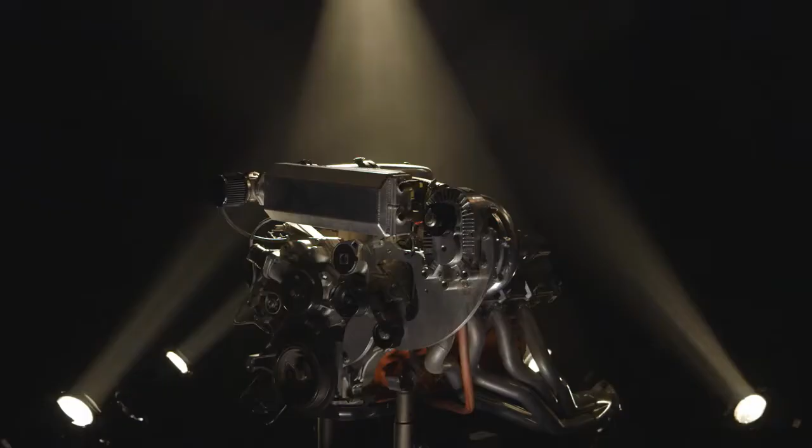This is the very first episode of an all-new series called Engine Masters, presented by AMSOIL. On this show, you're going to see me and my buddies having a whole lot of fun while doing serious testing on the engine dyno. We're going to be verifying the performance of speed parts. We're going to be doing a lot of head-to-head shootouts and telling you the whole truth and nothing but the

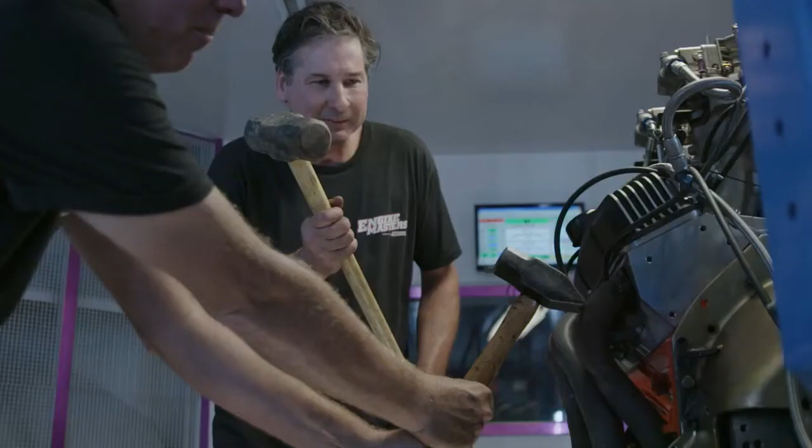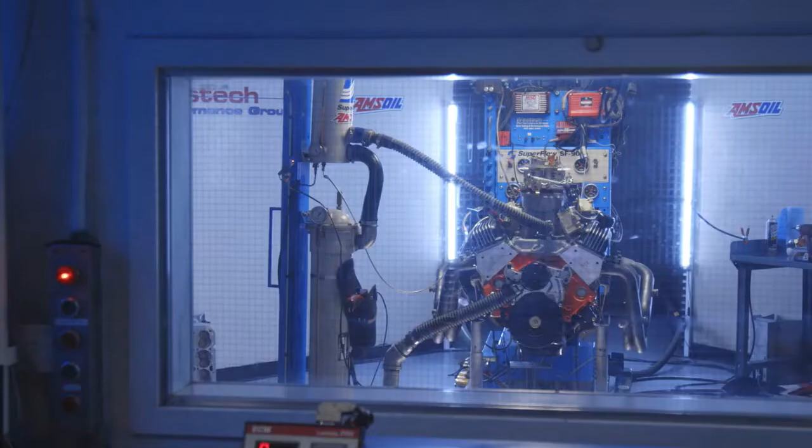truth. With me, you'll see Steve Dulcich, who is the editor of Engine Masters magazine, and you'll see other Steve Brule, who runs this place, Westech Performance Group in Mira Loma, California, where we do all of our dyno testing on the Superflow 902, and we're gonna kick it off finding big stinky power with a tunnel ram on a crate motor. Here's our baseline for the day.

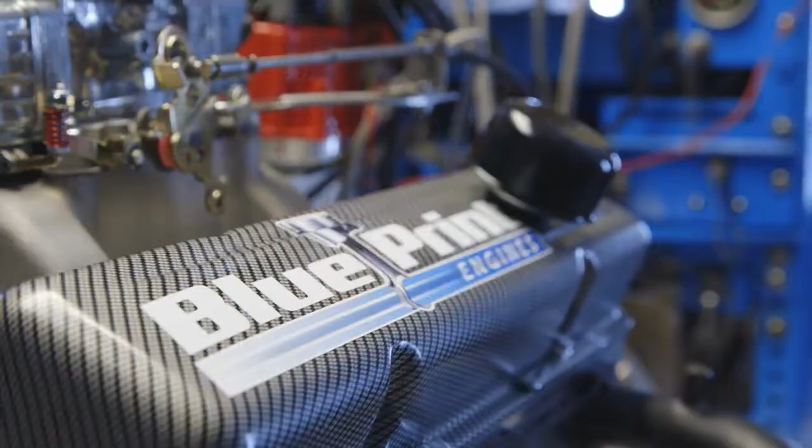A Blueprint Engines 400 cubic inch small block Chevy that's advertised to make 508 horsepower and 473 pound-feet of torque. We'll find out. The company is also pretty interesting because they design stuff, they manufacture it, and they assemble it and sell crate engines which are tested before they leave.

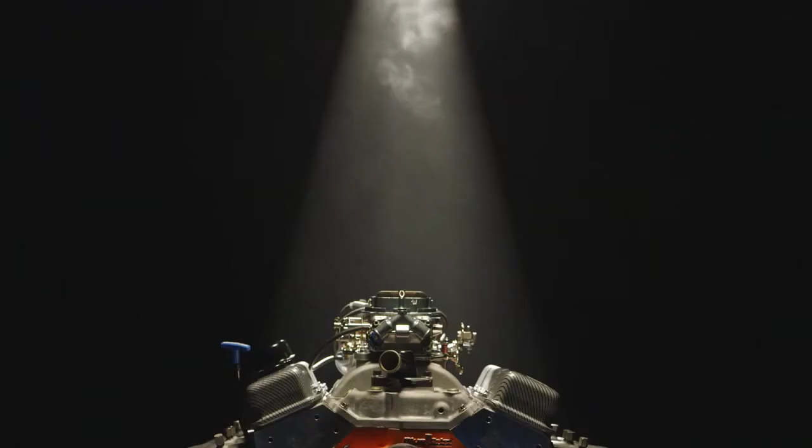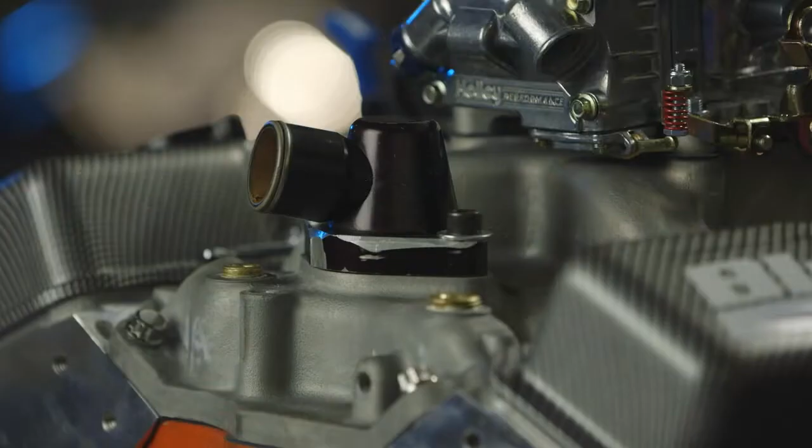This block is actually made by Blueprint Engines, so is the cylinder head, and when they put it together, they'll sell you this whole thing for $7,000, which is a pretty good deal considering it comes with everything you see here except for the water neck, the electric water pump, the damper, and these dyno headers. Now let's talk about the tech basics on this thing.

First of all, the Blueprint block is cool because it comes with a 4.125-inch bore. That's bigger than a standard 350 Chevy, which is 4-inch. The compression ratio on this is a zero-decked 10.3:1 with forged pistons and a forged crankshaft. The camshaft in this is a hydraulic roller. It's 236, 242 degrees of duration at 50 thousandths tappet lift. The lift is 553, 576, and it's on a 110-degree lobe separation angle.

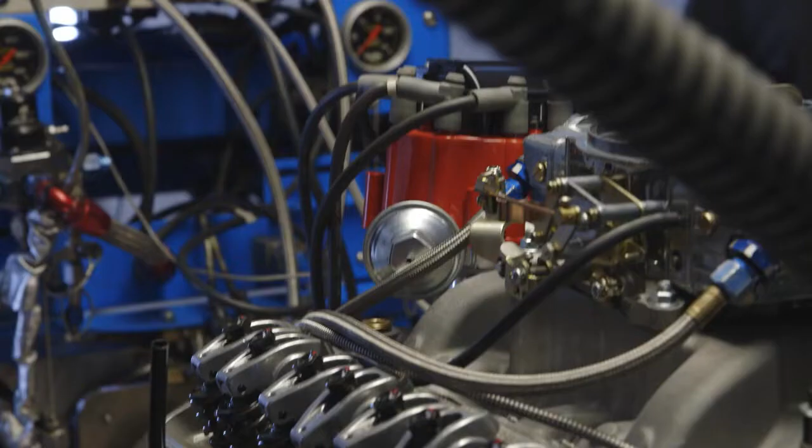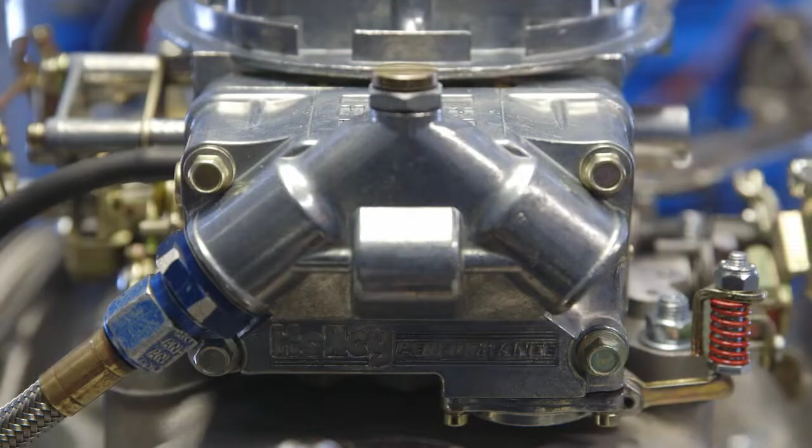Up top are the cylinder heads that we'll be testing today. These are an as-cast head, non-ported, with a 220cc intake runner. Up top, we've got a high-rise dual-plane intake manifold, and that is an 850 CFM Holley double pumper. Ignition is standard HEI, and the headers here are dyno headers, which make good power, and they're a 1 3/4 inch tube.

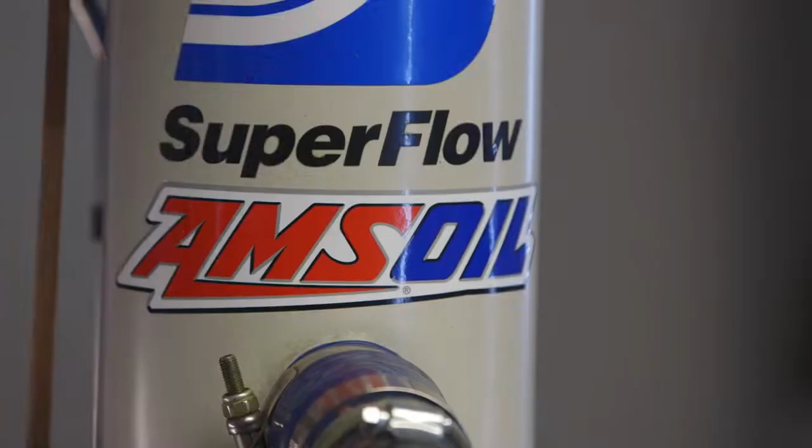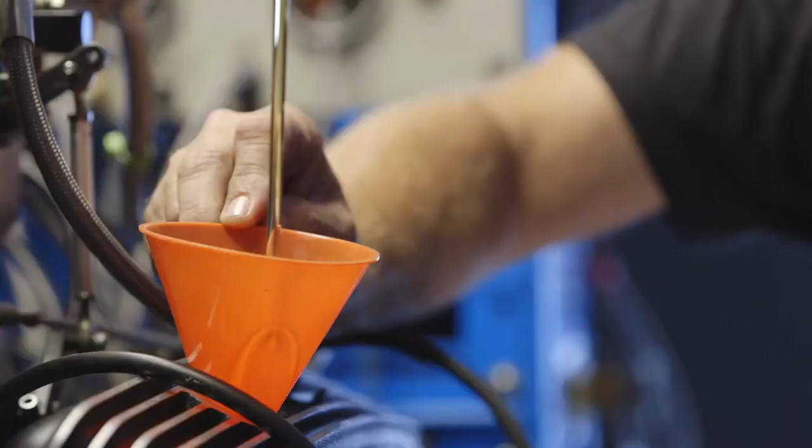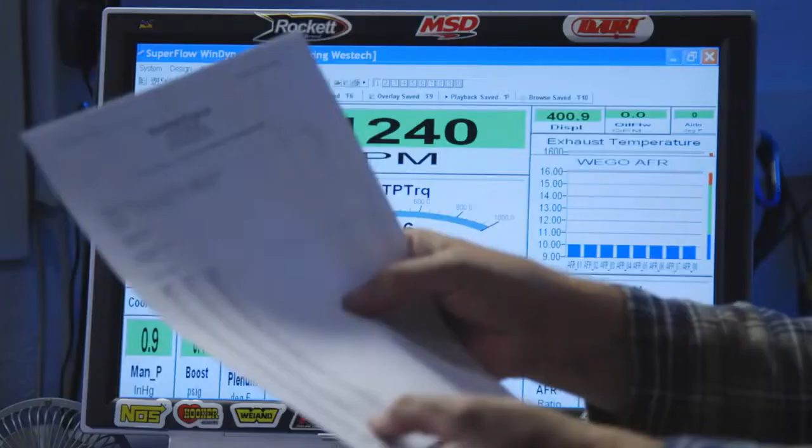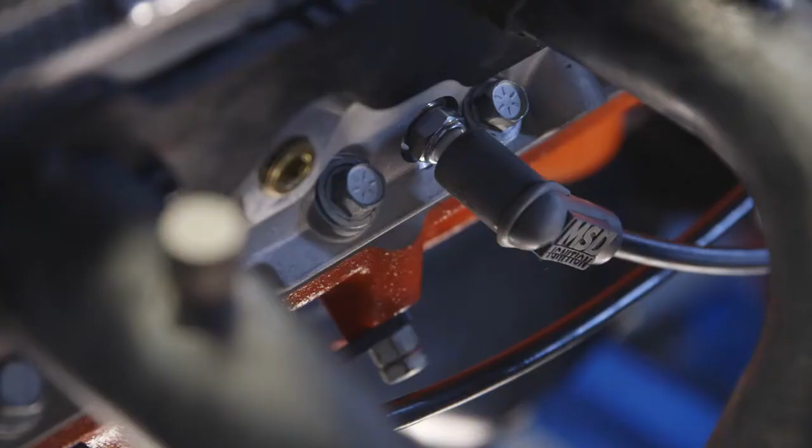We've got the Blueprint 400 loaded on the dyno, and they shipped it with a dyno sheet that Steve is holding, and it claims 509 at 6,200, which is right on target, but they made way more than 500 pound-feet all through the mid 4,000 range with a peak of 516.9. Wow. So we'll see. That's a lot of torque, even for 400 inches. This is the moment when we find out if Blueprint is mad at me or happy with me.

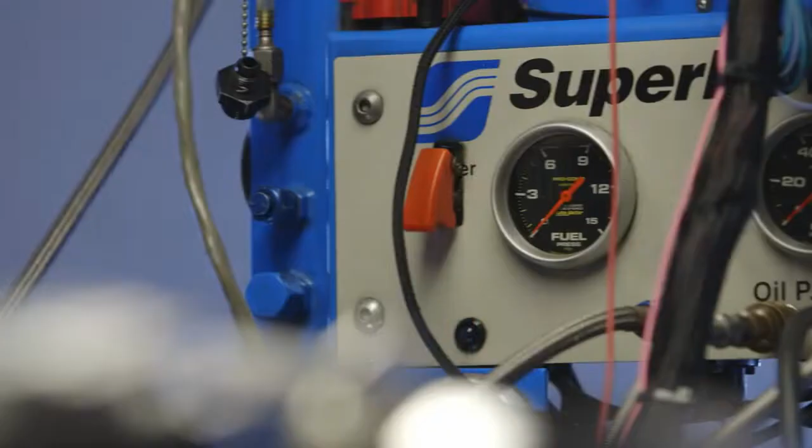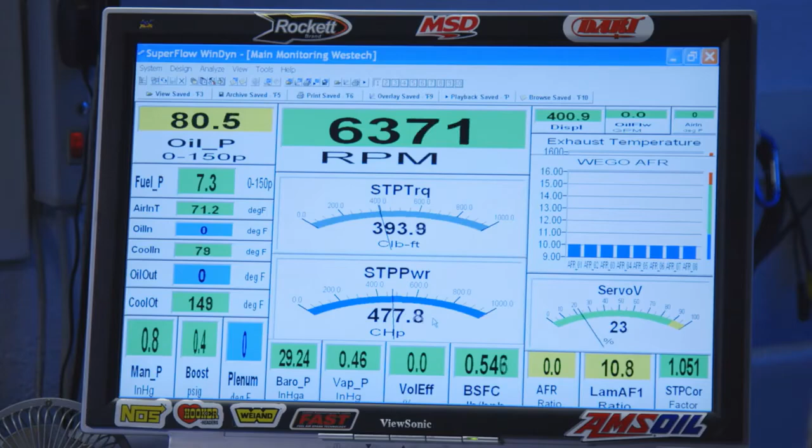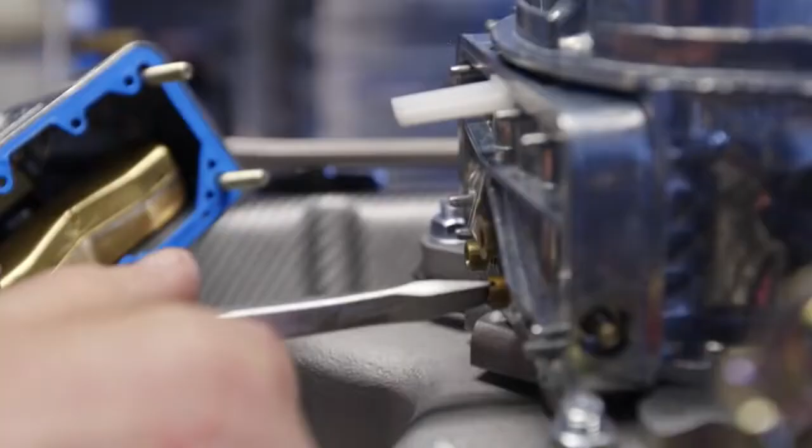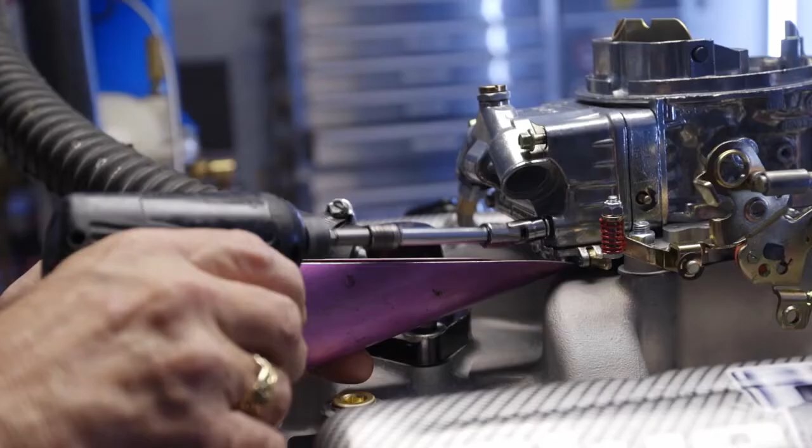Nowhere near. Yeah, we've got some tuning to do, obviously. It's still way rich. Here's what happened there. You saw that it ran way too rich. So while these guys were changing jets, I called Blueprint Engines and I'm like, what's going on? They normally test at like a 72 jet, and they're at 2,500 feet of elevation. This thing had 80s in it. 80s front and rear, which is kind of unusual.

We looked at the cruise air fuel ratio right before we went and made the jet change, and I think we're gonna be good and safe here. Okay, let's find out how much we fixed it.

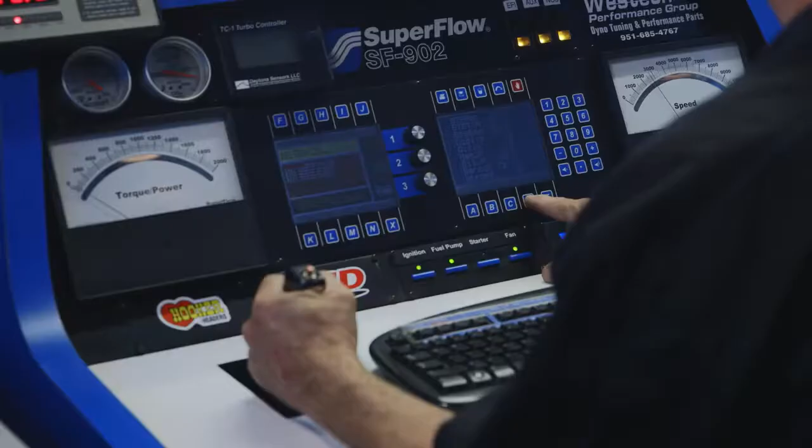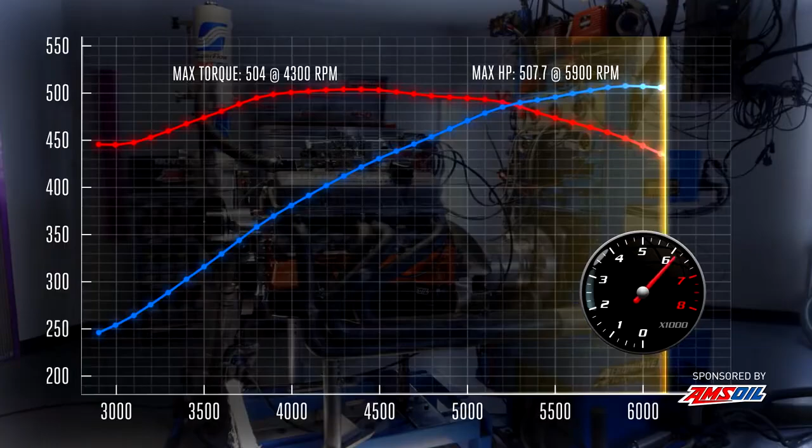Oh, we now have rock solid oil pressure. That's better. I didn't look at the power number. What do we got? Yep. This is now pretty much exactly what Blueprint claimed.

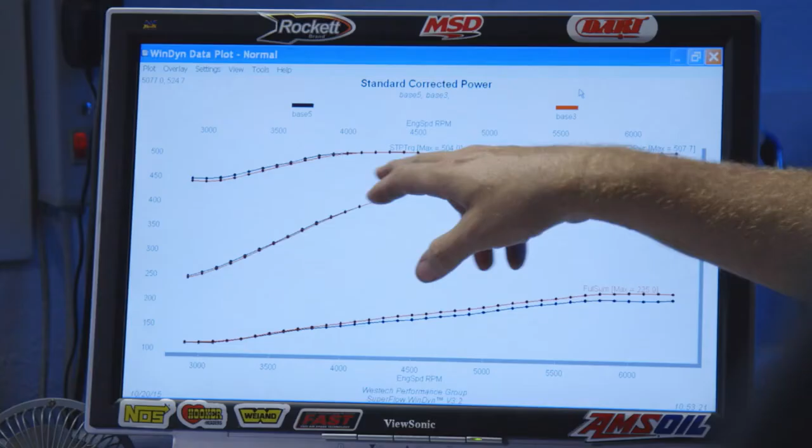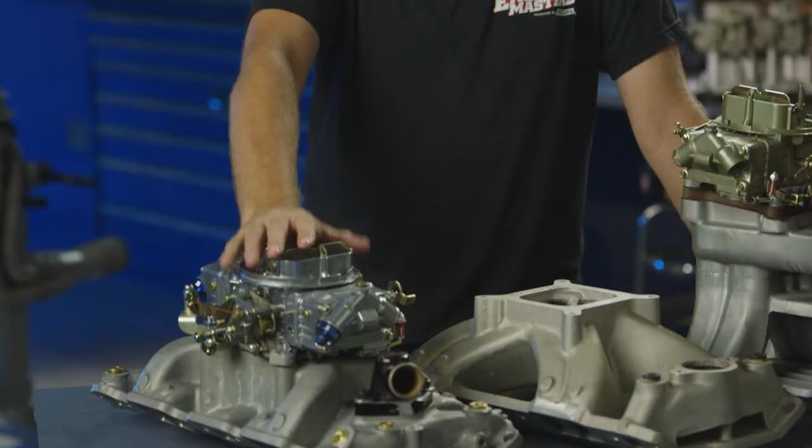Now we get into the meat of my theory, beginning with the fact that this intake manifold and carburetor made 500 horsepower, 500 pound-feet of torque. It's a high-rise dual plane. We've run these a lot. We know they work good under 6,500 RPM, but you'll see a lot of guys take an engine like this and they want to make more power, they want to go to the drag strip, and they will install something like this big Super Victor intake.

This can be good at the drag strip. It probably will make more horsepower up at the top end, but I am going to guarantee you from experience, 9 times out of 10, this is going to throw away power below the torque peak. Virtually every single time. And that's all about runner length. The dual plane has a big long runner. This has a shorter runner and more plenum volume, which brings us to the tunnel ram.

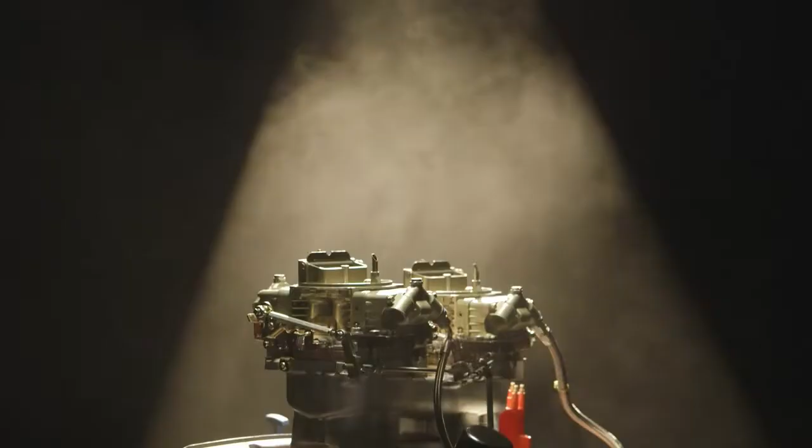The thing I see on the internet all the time is people saying, you can't run a tunnel ram on the street. That's only for high RPM. That's not going to work. I'm going to go on a limb right now and say that when we run this on our Blueprint 400, it's going to make more power at every point in the curve than that dual plane. And here's why. It has a long runner to it. This isn't a short race style tunnel ram.

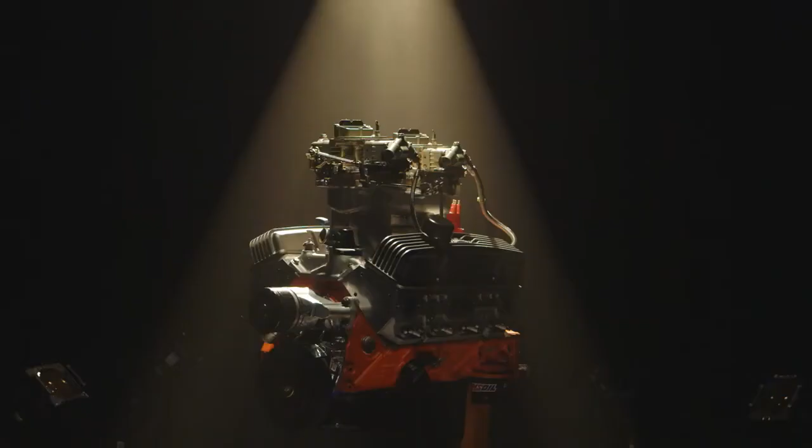This is a big street tunnel ram with a long runner, and that's gonna give us the torque that we're looking for at the bottom end, but it has way more airflow than we have going on here, because of course it has twice the number of carburetors, and it makes power because it has a much straighter shot into the port. With this type of manifold design, you've got your port here and your manifold here, the air's gotta make a turn. This one's a straight shot down to the valve, and that's why my theory, which we're about to back up, is that that tunnel ram is gonna work better than any of these intakes.

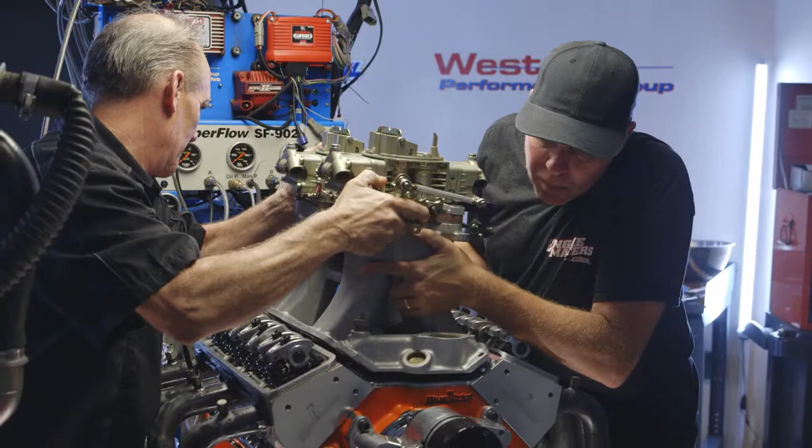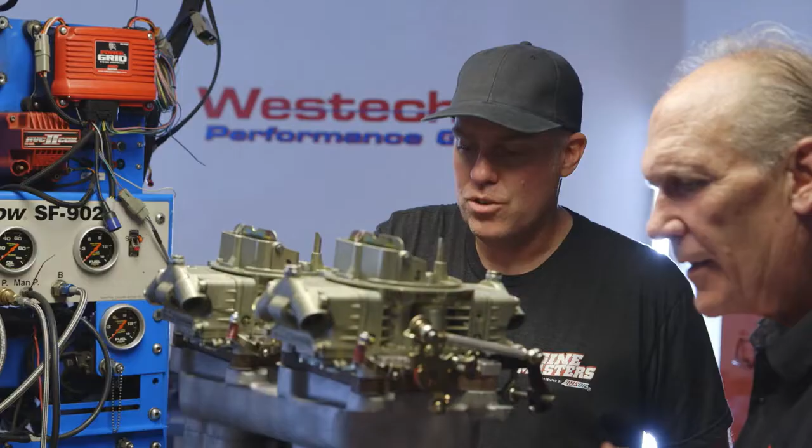One downside though, this junk is heavy. Ugh. This is an old Edelbrock TR1Y. It has, I think, the tallest runners of any of them and the biggest cross section in the runner for just a cast street manifold. The carburetors, you'll notice, are also old school. I didn't go with the HPs. So this is a regular old school Holley 4779. It just wakes it up, doesn't it? Yeah. It looks good. If it runs as good as it looks, we're in good shape.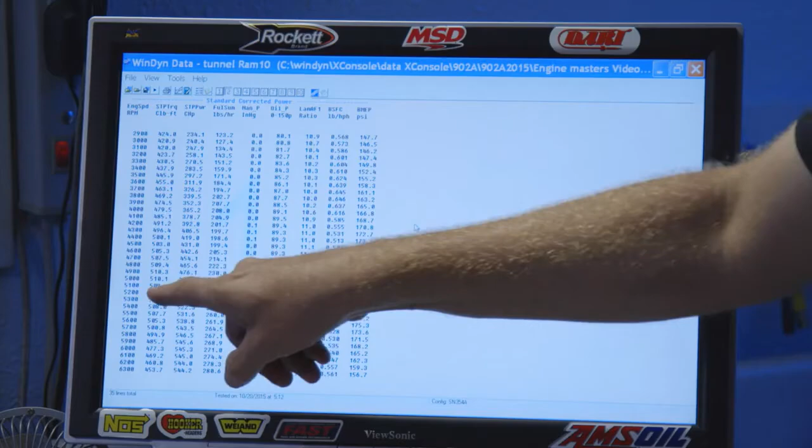And then we discovered basically that dual plane was hurting this thing. Yeah. I was correct that it did move up in RPM, way up, 5,000, 4,900 RPM at 510, but it's making 545 horsepower and this thing is pig rich. 11.3, we're gonna make this thing make 550 here in a couple minutes. This thing made a lot more horsepower than I expected, but not the torque.

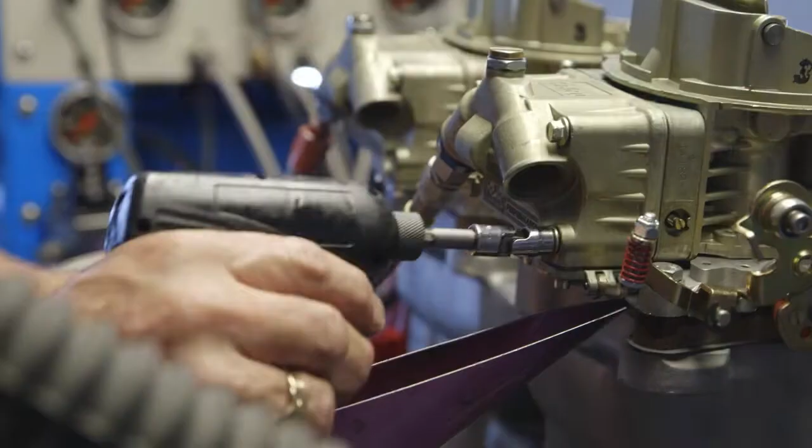We just leaned the thing out, so hopefully it doesn't run at 10 to 1 at wide open. So we took 4 jet sizes out of all 4 corners, and Steve's dyno brain says that pulls out exactly 1 point of air-fuel ratio. That'll make it perfect. And also, notice how the tunnel ram fires right up. And notice how the tunnel ram idles like a pussycat.

They are hard to cold start on the street in the morning. You got to pump quite a bit of fuel into them. That must be in Michigan. Right. And we're in California, so it doesn't matter. Yeah, forget those people.

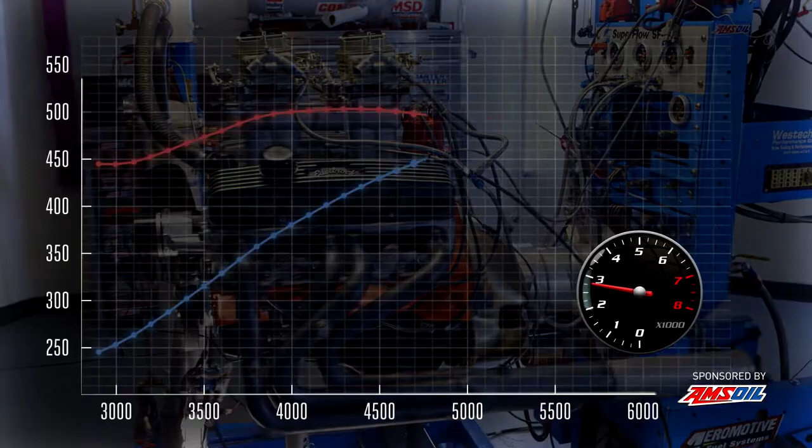It appreciated that a lot. Yeah. I'm actually pretty good with the numbers as far as air fuel. Yeah, I saw that. It really didn't like to load though. It's hard to do wide open throttle at full stall at 3,000 RPM. Yeah, but with two crossed over carburetors, way earlier in the curve. Now we're making 553 horsepower and 519 pound-feet of torque. Let's see the overlay with the dual plane.

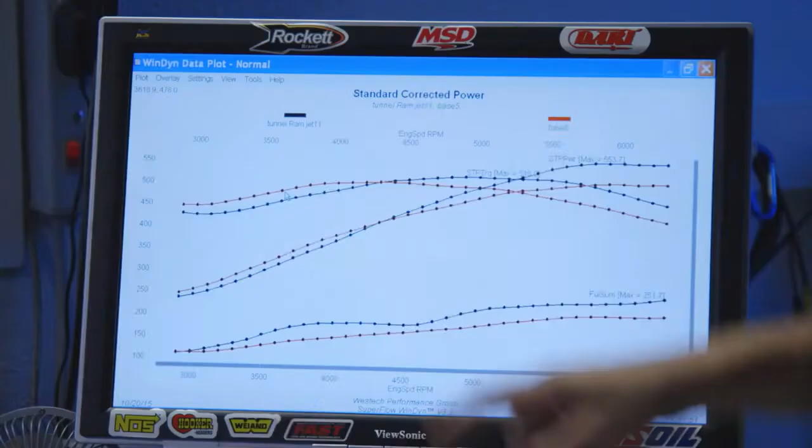Oh, I'm still losing. I made the vehement statement that the tunnel ram was going to be better than the dual plane everywhere in the curve, and it's doing more of a typical dual plane versus single plane thing. You need to pay more attention to internet experts. Oh, that's the problem. I'm obviously not one. Nice doing business with you guys, fellas. Nice doing business, boy. That's right.

I've always liked tunnel rams. Yeah. And we've proven that the small block Chevy loves tunnel rams. It does. I've actually had this thing on a 305 Chevy and on a 350, and that's where my claim came from that it was going to make more power everywhere in the curve, but it kind of let me down on this thing. Well, you can't concentrate on the negative. We picked up about 50 horsepower on top. Oh, more than that. Wow. Yeah, that's pretty good. Would you sacrifice a measly 20 pound-feet down at RPM that you never drive in for 50 horsepower up top? No. It makes that bottom end completely irrelevant.

I've got to say, as much as we're hyping the tunnel ram, for a lot of people it's still not for them because of the hole in the hood. And also, you really need to be pretty savvy with your carburetors to get the drivability down. Part throttle drivability on this thing can be a challenge. I got to give props to Blueprint too. This 400-inch crate motor did exactly what they claimed it was going to do and took a pretty good beating while it was at it. Yeah, this is a great motor with a great induction. It's a pretty good combination. So you're sold? Oh man, I'd love to have this thing in a Camaro or Nova or something like that. You heard that from Mopar Guy.

You know, think of this, Dulcich. Yeah? There's a bunch of kids watching right now who have never seen this. They don't even know what a carburetor is. They just know that it looks magnificent, whatever it is. Oh, they're realizing that right now. Yeah.